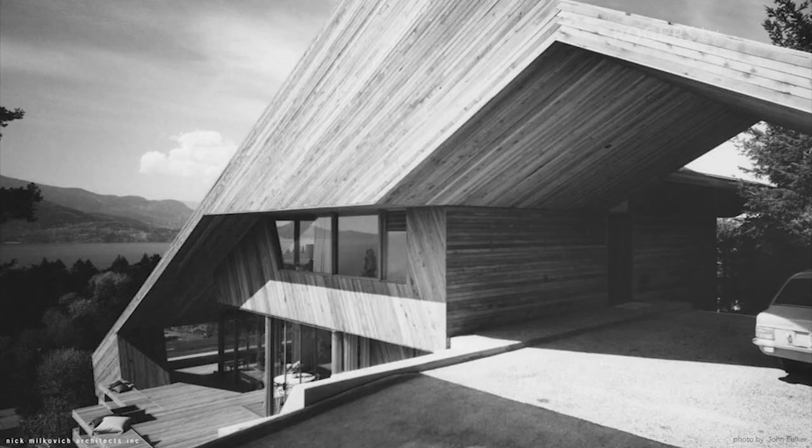It was a Catton house. It was probably the only real sculptural house that Arthur has done. Most of the other ones are more linear, but it was an interesting challenge. It's on a cliffside, as you'll see in the photos.

After that, my journey continued until about 1991, when Arthur's bankruptcy ended his journey as a solo practitioner. And then we opened Milkovich Architects, and we worked in a consulting framework with Arthur until he passed away.

For the project, like the Home Lumber office in Victoria, to put it in context of the time that happened, Simon Fraser was opened in '65. The Gordon Smith House was also finished in 1965. The MacMillan Bloedel building was finishing in '68. So these are prominent, recognizable works of Erickson's, and they all also spoke to the Home Lumber office in that regard.

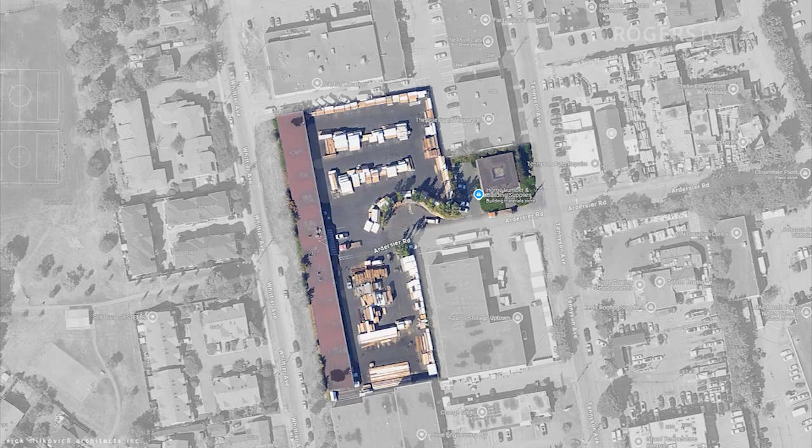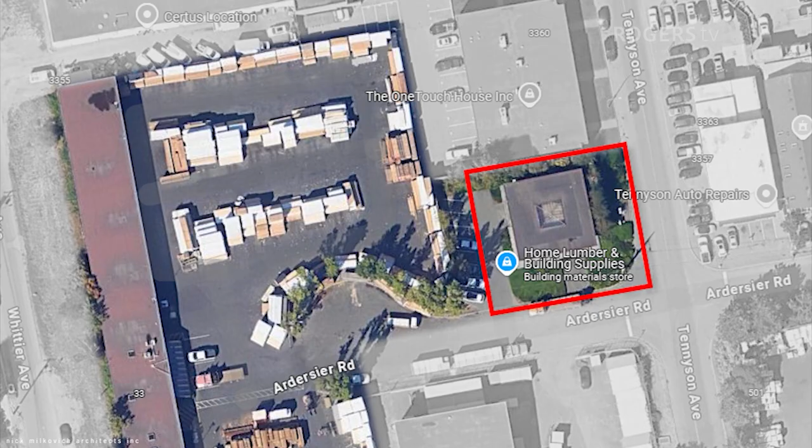The site was an L-shaped site where the broad side of the site in the back was the storage sheds for the lumber and the lumber yards, and the office is right on the entry corner to the site. And the office served as the clearinghouse for the pickups and whatever else was being bought at the site.

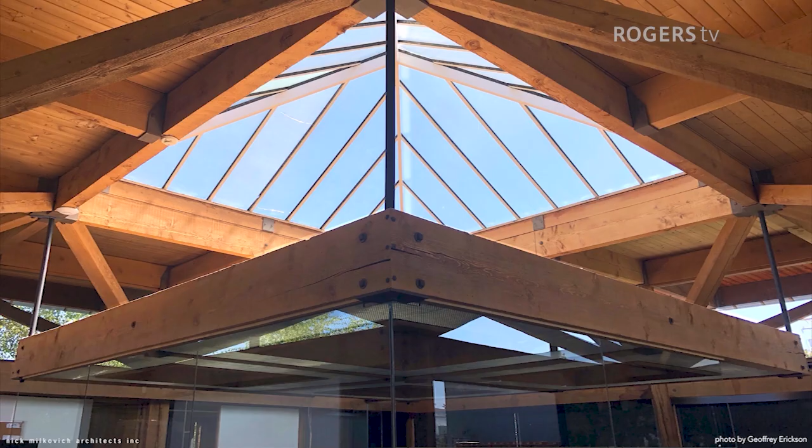The structure is a tree structure in the Home Lumber office, and it was based on a 9-square plan, where the arms that branch out from the columns form the surrounding perimeter. There were 8 columns around the perimeter that held up the trees, and the center of the ninth square became a skylight and an inversion of the tree structure. And under the skylight, there was a canopy hung to dim the sunlight into the space.

It was composed of a general office, the front office in the large space under the frame structure, and then lower, more private offices around 2 sides at the back. And the whole structure was placed on a black terrazzo base. Centered on the glazing line were 12-inch columns approximately 18 feet on centers, topped with a 12-inch beam joining them.

And as the columns continued up to the roof deck, they were cut off at 45 degrees. The corners were cut at 45 degrees to accommodate the 4 branches that touched each column, and then up to the beam structure for the roof. It also accepted the glazing line that ran through the columns at the base, and then at the corners of the diagonals that were sitting on top of the base column.

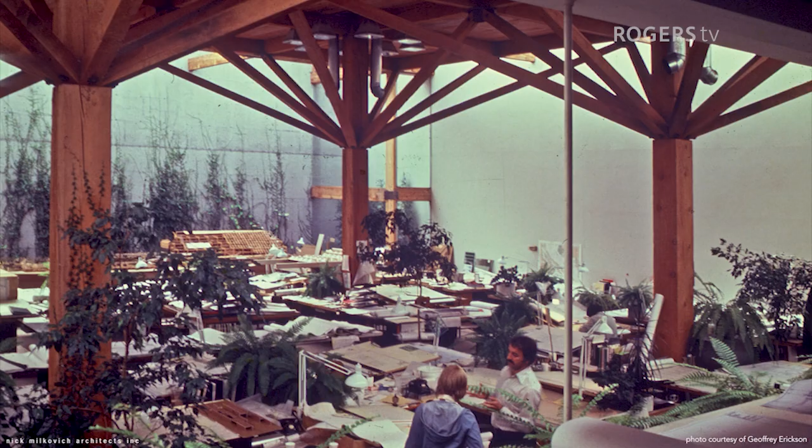When it was being done, we had moved into a new facility that we designed as our office on 8th and Laurel. And it was an interesting structure. As you'll recognize, it's very similar in many ways to the Home Lumber office, but it was an indoor structure. It was totally interior, with 4 14-inch columns that supported the roof, and skylit around the edges. There were no windows looking out other than what was in the coffee pit. So it was an interior space, but beautifully lit. It was a wonderful workspace.

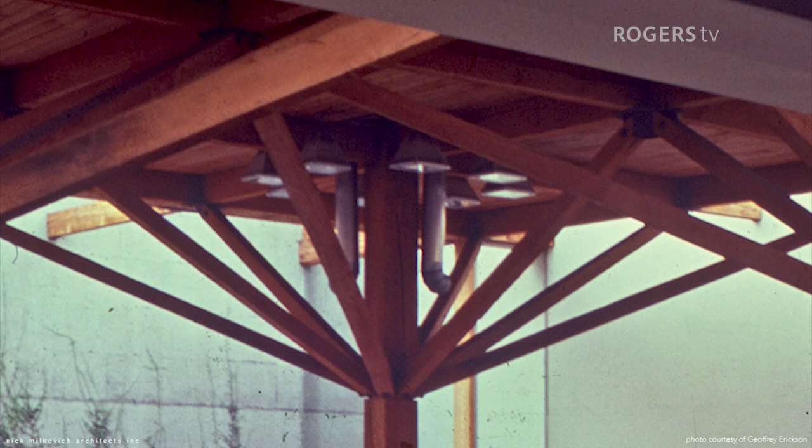And the lighting in that space was from these lanterns up above. And the mechanical system came from the rooftop systems through the ducts that you see in the photograph. And that was an inspiration for Home Lumber also, as we were surrounded by it, and also what an advertisement for their business.

The works before Home Lumber really were pointing towards what this might be, or the way it might be approached. And typically it comes out of the desire of the client. In many ways, they need a space, but also their business is lumber sales. And so what other way to treat a building than as an example of what you can do with lumber?

The first Eppich House is concrete because the owners wanted something that's long-lasting. They're from Europe, and their houses last 300 years or so. So they wanted something that's fairly low maintenance and is durable. They weren't looking at wood that much because of maintenance, etc.

And the second Eppich House is steel, because that was their business. They were steel fabricators. And so they were great clients in the way that you could draw anything and they'd make it. So it became quite experimental, including the furniture. So it's in that same context.

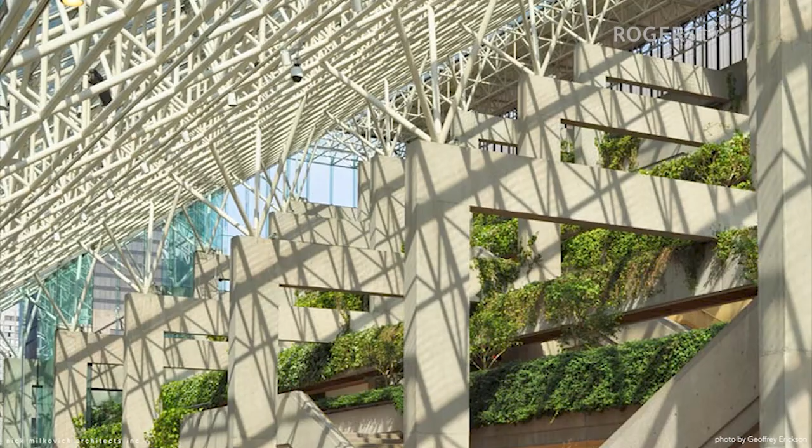It's hard to view any of these pieces alone because they learn from each other, and even when you think of the law courts, it's got a frame structure, a concrete structure with almost tree-like supports that carry the roof, the steel roof and the glass above. So they're all connected in some ways, and you learn from each one and you store it for the next project.

A great experience for me to have had the opportunity to be involved in some of these things, and massive learning just by exploring. And the office was interesting in that regard, in that it was like school forever, because Arthur was not an autocratic designer. He was more Socratic, and it was more questioning and trying to answer the questions.

And so you had a significant opportunity to put ideas forward, and that was most evident probably in the law courts, because it was a large building, over 1 million square feet. The people that were leading the project were only 35 years old, which is quite young in an architect's career. So it was a great experience for all of us that were involved in that project.

Putting forth ideas, our thoughts, and working with Arthur, where he had a great eye for detail and proportion, he's like a visiting critic to some degree, but also the collaborator at the same time. But it was never do this or do that. It was always, what do we have? Let's see how it feels, and just a process of discovery till we think it's had enough interference, and then we just stop. I wish most architects, when they graduate, would have a similar experience, because it was a nice way to work.

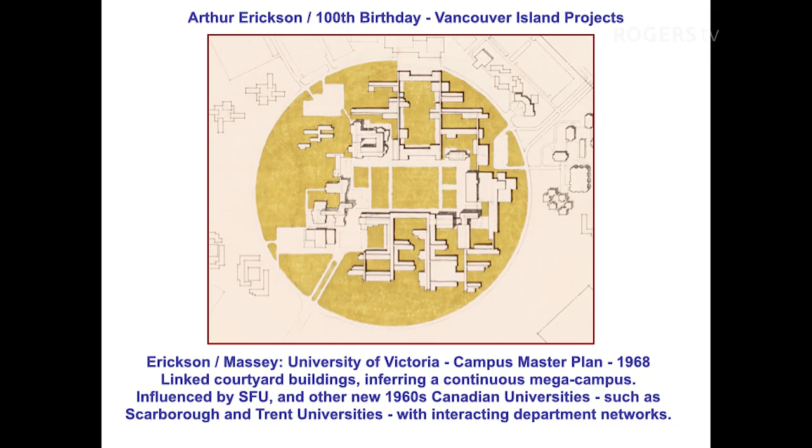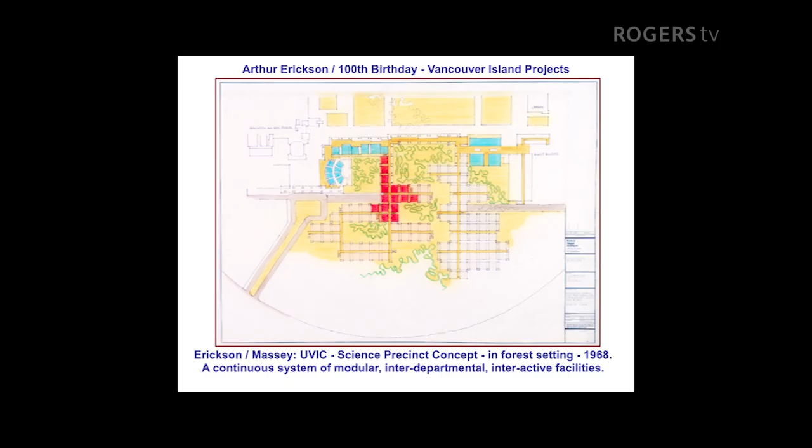And that's exemplified in this quick planning sketch that they generated for the area around where the science building is now, just south of the quadrangle, again set into that wedge of forest that went into the campus. They used a modular concept of a cluster of science buildings growing into the site here. So this is another really key concept they had for planning as UVic would fill in and move ahead. And they did a whole series of characterful campus sketches showing these new buildings linking. There were other buildings in the same idiom being built at the same time, the Commons building at UVic and some of the early housing.

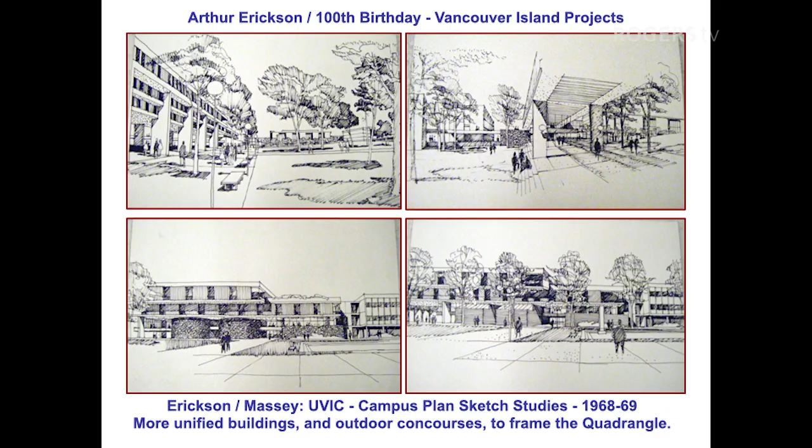And the idea of a sort of new concrete, interlinked campus development was evident in the sketches here. The presence of nature, though, in the sketches, again, is very, very integral to Arthur Erickson's sensibility. So he's got both the grand scale and also the rich landscape qualities.

So their first commission would be for the new biological sciences building, which was a component of that cluster to the south of the main quadrangle. This is one of the first concept drawings, and it shows how simple the organization, the plan was. Basically, it's a series of classroom labs, all done in modules, and in the corners of each classroom there'd be a tiered structural and service bay that would come up to support the building. And then the colored area was actually corridors and a study area that would spill out into the forest surrounding the building.

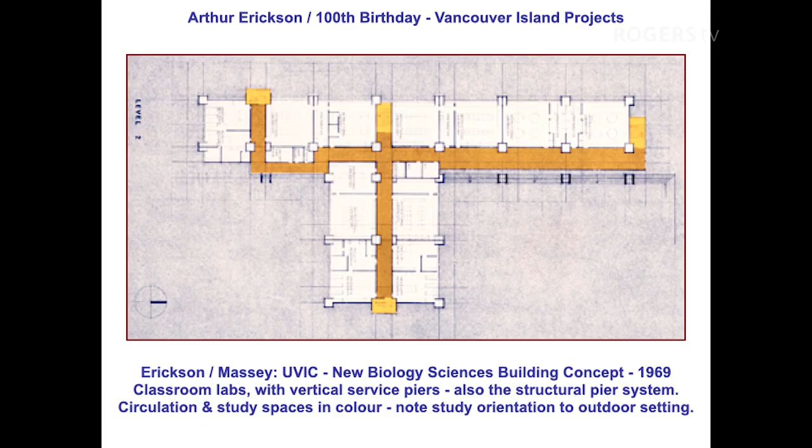So this is a very economical and very logical concept for the building, very straightforward, but very efficient at the same time. And that would quickly evolve into the early plan for the new biology building. You can see the piers that they had at all the corners of the building are now rotated to become angular. They would often have services for the building, and they also, as we will see, became part of the structural form of the building.

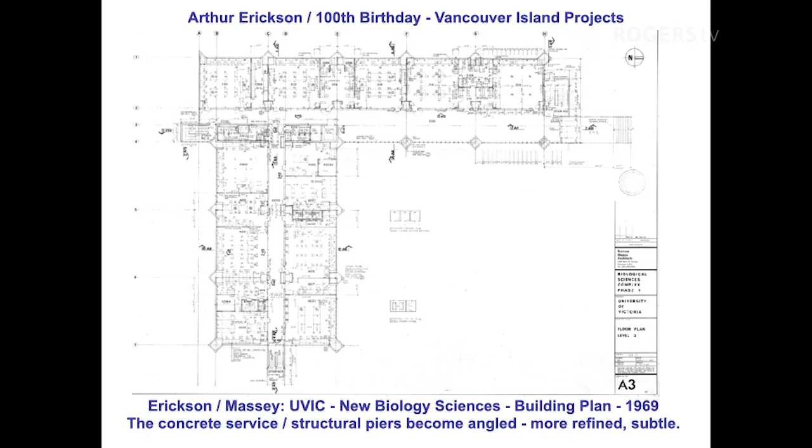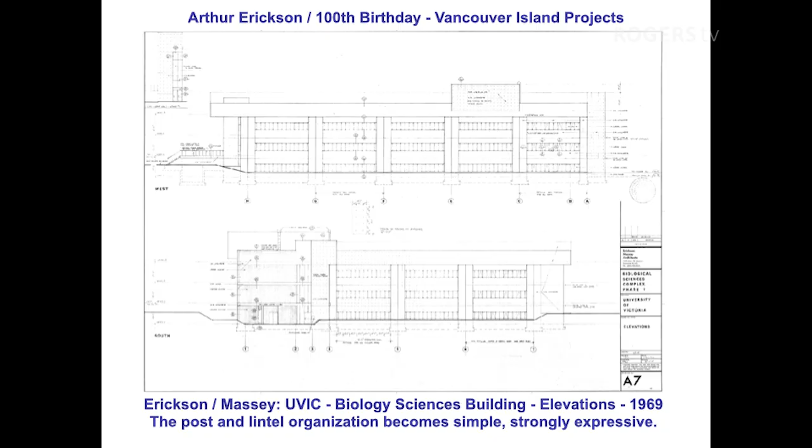Here's the bays of study areas that were open to the forest. The views of the forest came up into this area. These plans aren't landscaped, but you'll see in the photographs that the building had a very strong landscape relationship. The post and lintel idiom that was very much Mr. Erickson's sensibility in the late 60s is evident in the elevations of the building, where you get a strong rhythm of vertical piers and then a big capping horizontal lintel across the top.

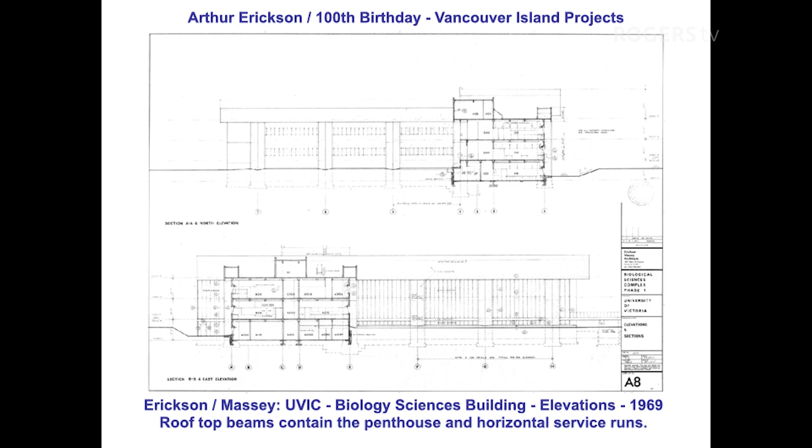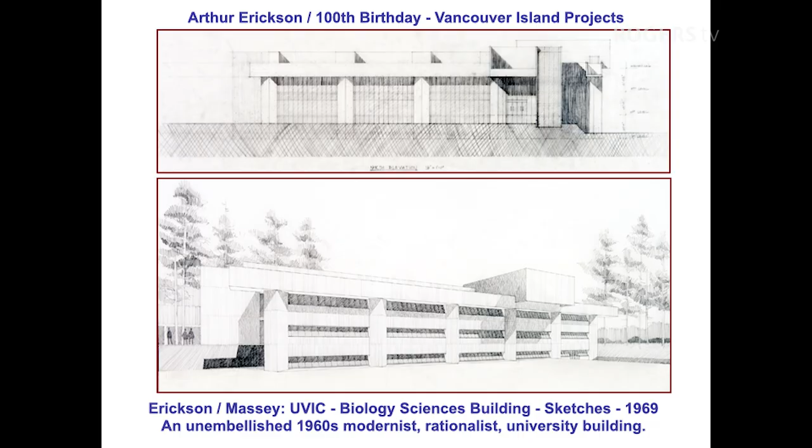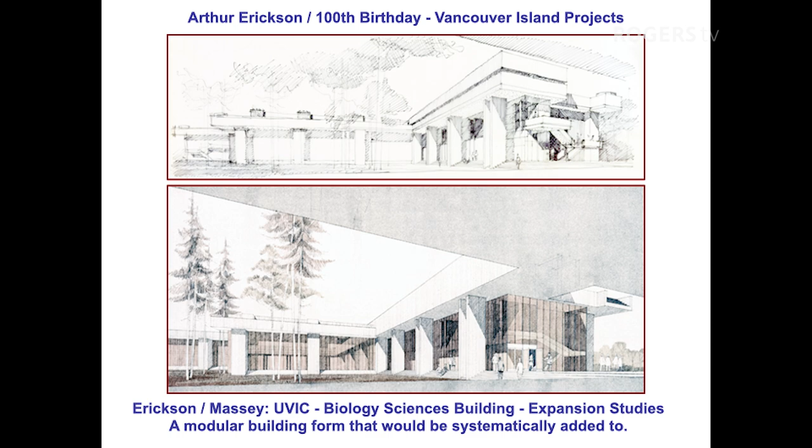But the other thing that was really powerful was that the structure of the building was entirely exposed concrete, very much in the idiom of the Erickson and Massey firm's work at Simon Fraser and other projects they were doing. So they brought over this idea of the concrete megastructure into the design of this building. And they foresaw it as a system that would extend from the original biology building into other wings and eventually create the science complex. So these are little sketch studies of the evolution of the science complex looking ahead.

So here we are. They were then commissioned to execute the building, all in poured-in-place concrete. I will say the quality of the concrete work is unbelievable. No pour joints, no areas of erratic concrete aggregate. Extremely well built, well executed and thorough, but an expression of power and of a grand, heroic modernist building. And you can see the way the beam structures would project beyond towards the landscaping. The building is set in a very rich natural landscape.

It opened just in the first year that I was beginning as an undergraduate at UVic, so I saw the building being finished, remember it being opened. I remember the discussions about it. It was definitely a very topical building in the early 70s. And here's some more photos of it again. It's a period piece. It is not one of the signature buildings on the campus, but it's a presence for sure.

And it is dated in many ways. The wood infill up in the ends of the beams is of its era. It's copper naphthenate treated cedar siding and so on. A lot of politically incorrect elements, I guess, of the era, and they're still in place there. And of course, it's a laboratory building, so here we see the laboratory activities projecting from the building. It's full of the biological sciences. It's been a very effective building for that department, which is probably one of the most prominent departments at UVic.

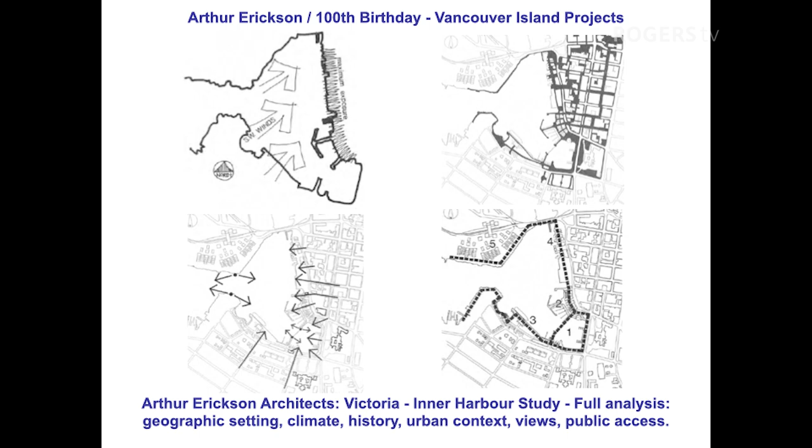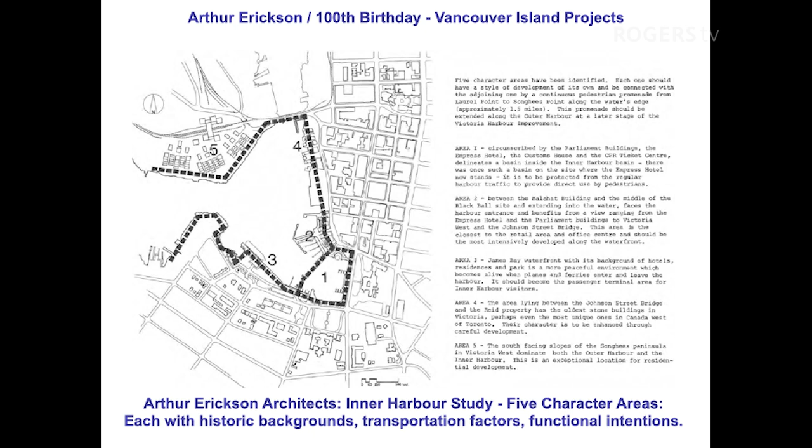In 1973, the harbor was still largely industrial, and he was looking ahead to it becoming urbanized and becoming a civic kind of place. Part of his analysis was to divide the harbor up into different areas of character zones, and a lot of this is still with us. This study is so sweeping and inspired and visionary that we are still kind of wrestling with little pieces of this vision that he put out. So, dividing the harbor up into character areas and having a plan and a vision for each of them.

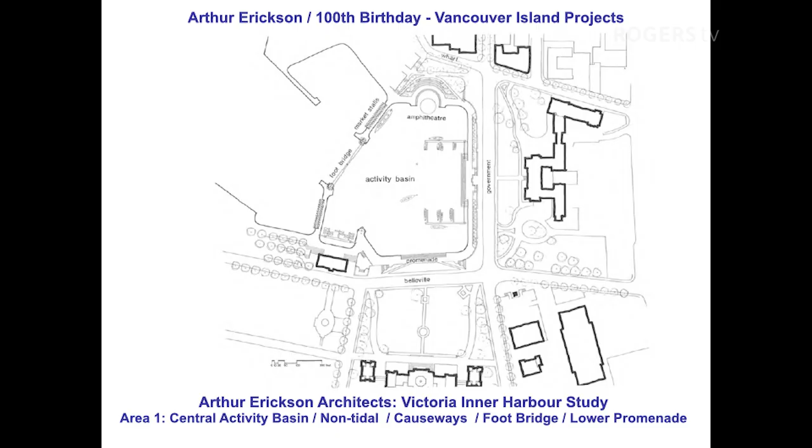This is his plan for the first area, which is the inner basin of the inner harbor, which he saw as what he called the central activity basin, just facing the Empress and the legislature. He saw it as a more captive area. It would have a series of pedestrian causeways surrounding it, an amphitheater on the north end, more elaborate terrace walkways leading down to the waterfront from the legislature and the Empress, and then a captive kind of dam and bridge that would actually capture the tidal movement of this basin of water. So the tides would not go up and down, they'd stay at a single level. So there was never going to be a low tide in the basin.

The next pressing area, again, these things are all still with us, was the area that we now call Ship Point and the area adjacent to Old Town. The Old Town report had come out just a few years before the study and was well referenced in the study, and Erickson's firm's ideas about how the harbor would relate to the Old Town were quite sympathetic. The scale of buildings was low and so on, and the buildings would kind of terrace down towards the water, and also the walkways and the view lines would kind of penetrate through the site.

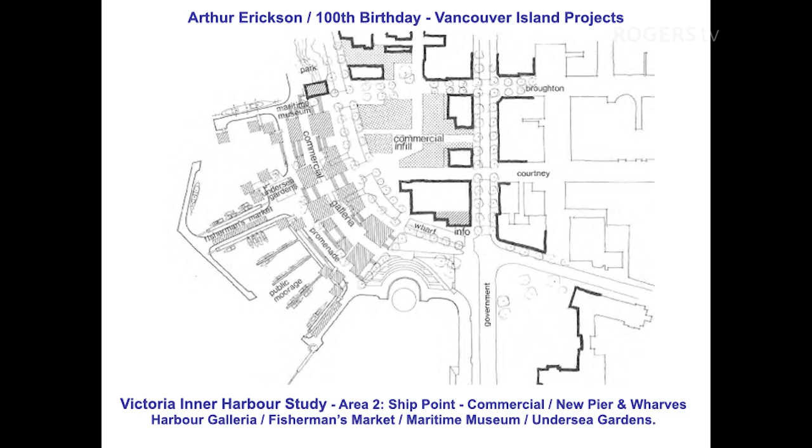So in this area of the harbor, he first saw, here we go, Maritime Museum, Undersea Gardens, Harbor Galleria, Fisherman's Market. So it was a very, very multi-purpose view of the harbor, very thorough. And then another considered area right now is the area on the south side of the harbor, which is where the Coho and the catamaran to Seattle run from.

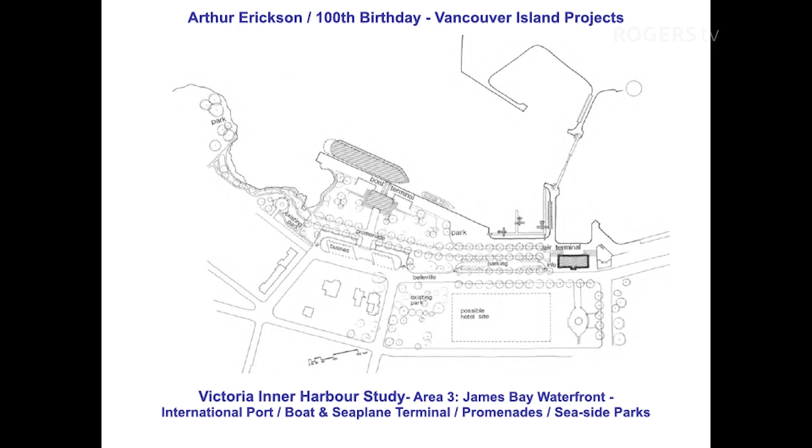And again, he had the idea of an international port, but also with parks, walkways, a seaplane base, a whole cluster of integrated planning. So the planning was so thorough and well integrated. The next area was up near the Johnson Street Bridge, where Old Town was sort of cascading into what he called a pedestrian mews, Old Town shopping mews on the harbour, in scale with the older buildings sort of up the slope.

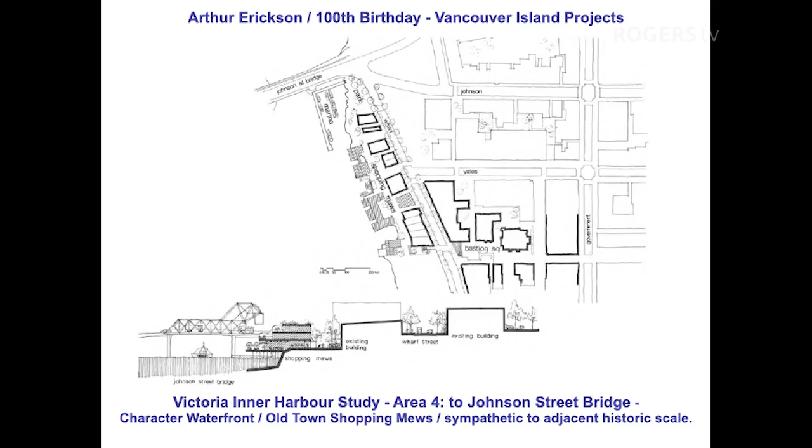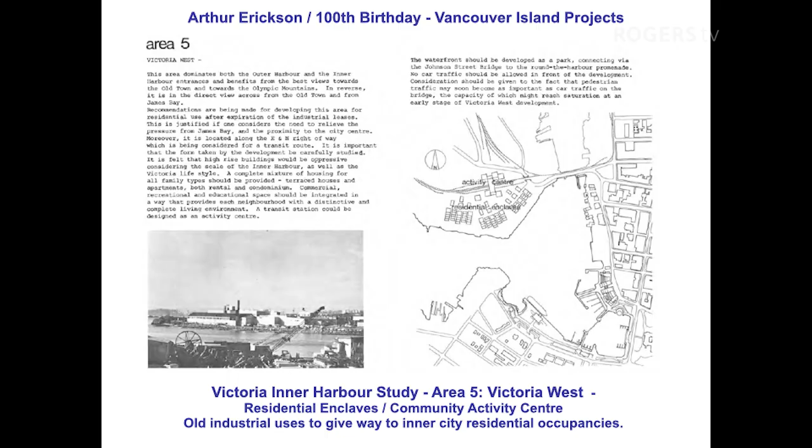The Songhees area, he had the idea at this stage, 1973, of it primarily residential use, also framing the harbour from that side. You can see the condition of the harbour at the time of the study. It still had large industrial buildings and sort of underused wharf areas all surrounding the harbour. It was really dead for pedestrian access except right around the causeway itself. And his idea was to enliven all the foreshore around the harbour.

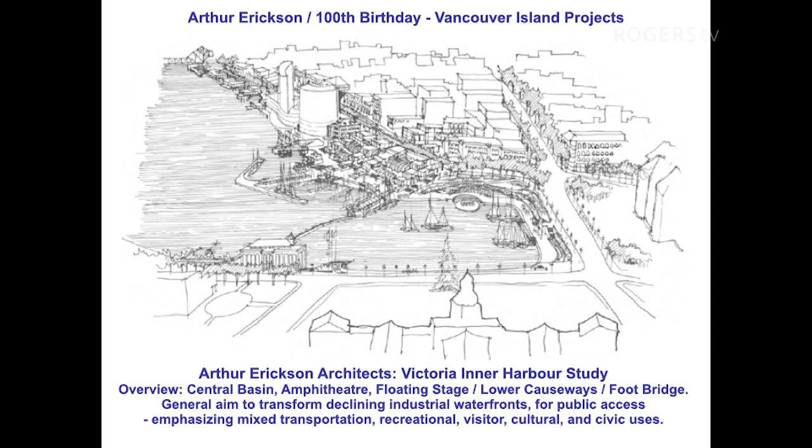And here it is sort of summarized in a quick sketch, which looks into that tidal basin. It looks through the terracing buildings sort of surrounding the Old Town area. Unfortunately, the Reed proposal, which had been originally for three point towers, pencil towers at the end of Fort Street, had evolved into sort of a simulation of Toronto City Hall. So that was a given that he had to adopt in the plan.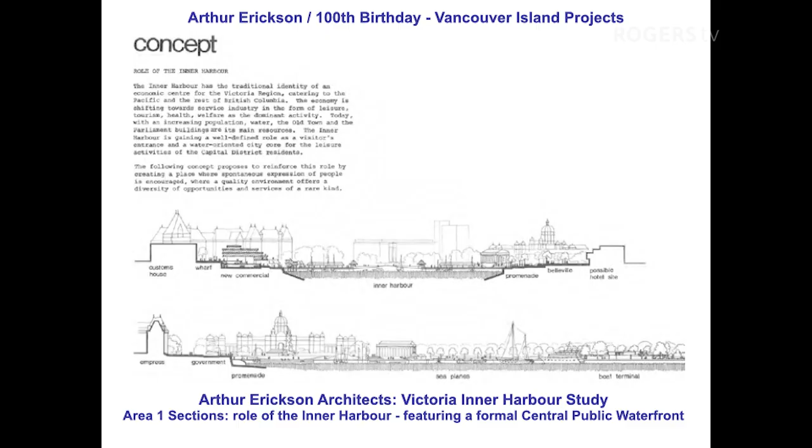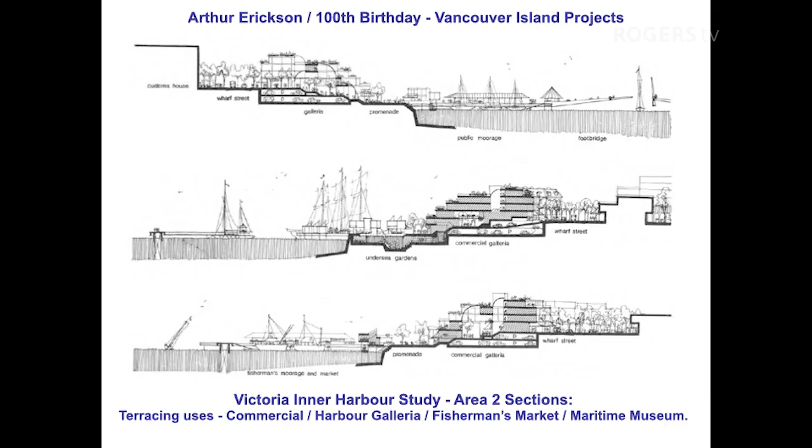And the firm did very elaborate, detailed concept sketches of the relationship of the surrounds, the public areas, to the water and to the harbour itself. It's a textbook example of an urban design plan. And the emphasis on terracing buildings, the emphasis on different water elements. I did mention the Maritime Museum and the Undersea Garden, but the expression of actual marine and aquatic uses kind of being focused on the harbour sort of run through the plan as well.

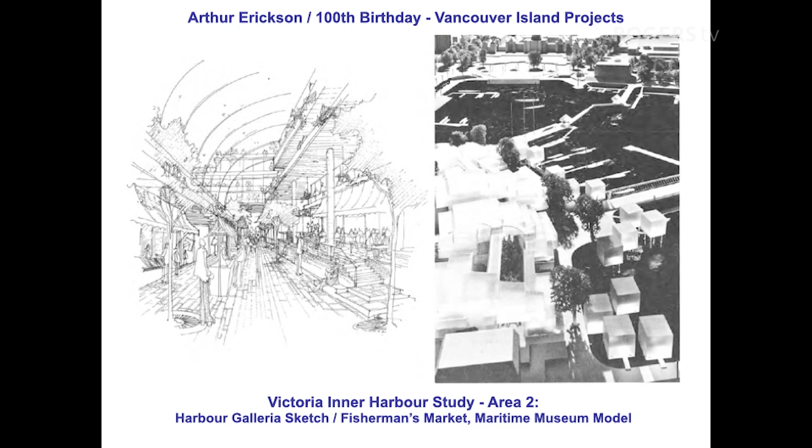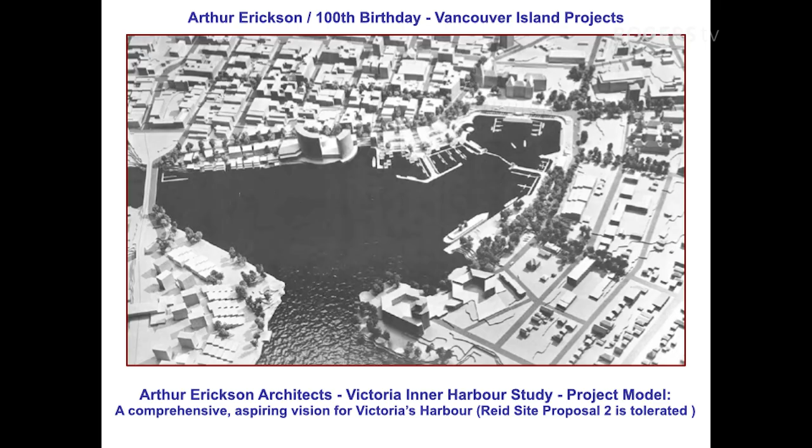And this was a sketch through the Galleria, and then also part of the architectural model showed some concepts of the Maritime Museum fronting onto the harbour. And this is a view of the overall model. The city had this model for decades. It's disappeared now, but it was very inspiring and challenging for Victoria.

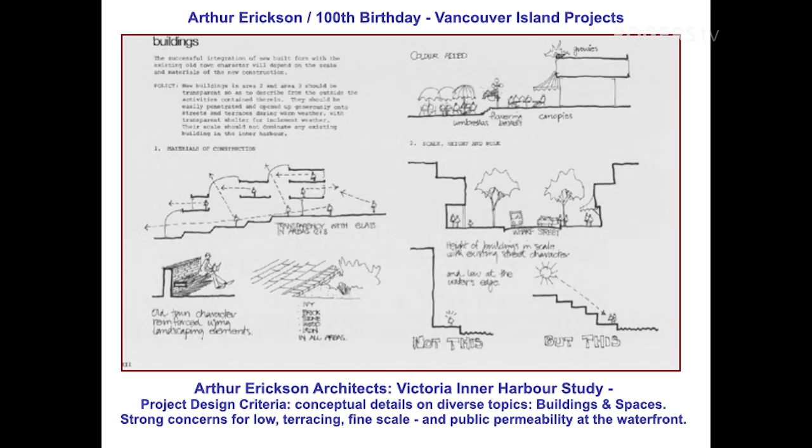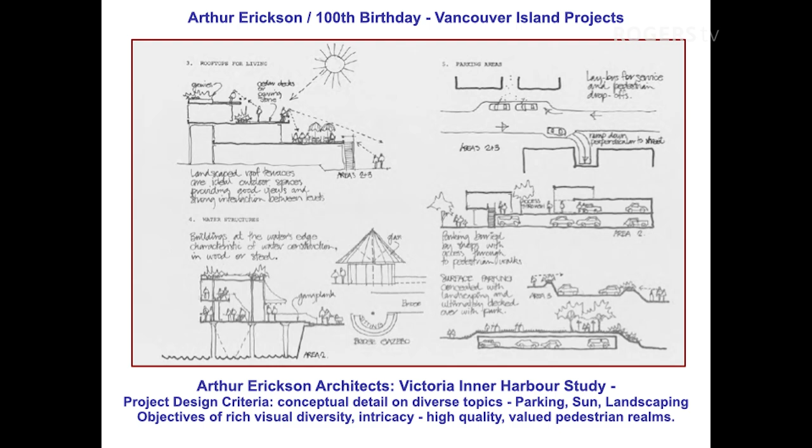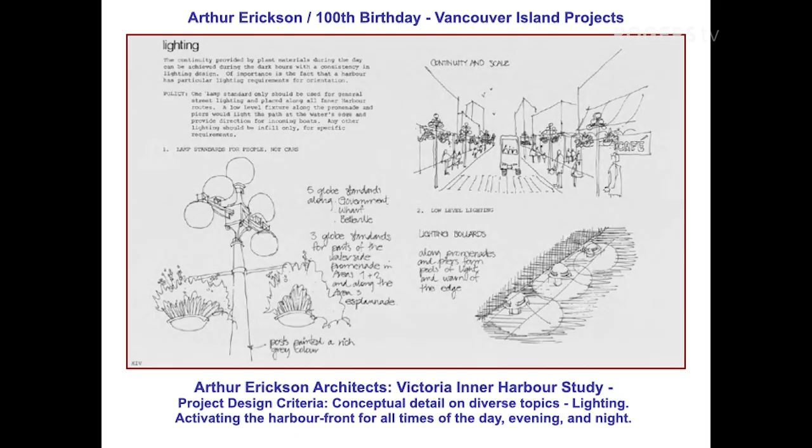It was full of quite rich kind of urban design concepts for buildings and for public spaces, for landscaping, for lighting. It's a textbook study. It should really be published. I haven't seen many projects with this level of subtlety in any city. And the landscape and lighting was given a lot of specialized attention as well. So it was visionary and very thorough and probing and bold.

So there were reactions. There were criticisms as well and also compliments, of course. For Victoria, this was an earth-shaking kind of examination. Peter Pollen, the mayor of the time, had instigated the study. I think he became quite close with Erickson, but there became quite a bit of to and fro on, well, can we really do all this? What about a captive water basin?

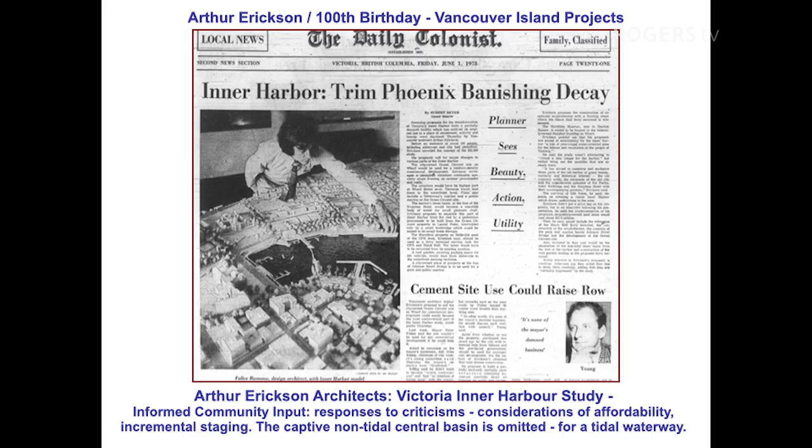And to all his credit, Arthur Erickson listened to everything, and the plan kept evolving. So the captive water basin eventually became just a tidal basin with a pedestrian bridge framing it. And there were other things that kind of evolved with the plan. So it's an interactive dialogue with the community. And there were lots and lots of great discussion. It was very colorful and lively. It's an honor for Victoria to have had a project of this quality. And I think it should inspire us all.

And he did actually manage to convince the province to step ahead for Victoria. And so the focus came eventually into creating the lower causeway areas around the Inner Harbour basin. So that's what could be afforded to be done, and made a lot of sense. It was not an entirely original idea. The idea of a lower causeway had been proposed in 1958 for the BC Centennial, when they had marine battles depicted in the harbour as part of the centennial celebrations. And planners at the time said, wouldn't it be great if we had a lower walkway causeway?

So the idea was already around, but the wonderful thing is that it was executed so well through Arthur Erickson and his office. It's a very refined piece of design, really complementary to the upper causeway. Norm Hotson was one of the young architects working on the project. Again, Arthur shared credit with all the younger architects working on the project, as well as took in their ideas and enriched the quality of the project. And also, there were continuous reviews, and it was an evolving kind of project. It was not a stamped, fixed kind of proposal just to charge ahead. And so over the years, it's evolved a little bit.

The portion of the causeway in front of the legislative building was a later addition, and Erickson sort of compromised there. He had a set of terraces and tiered passageways down to the harbour, but Victorians wanted to retain the Welcome to Victoria sign, which I think is still there. So he was tamed a little bit, but he was so visionary, and he's so uplifting for the city.

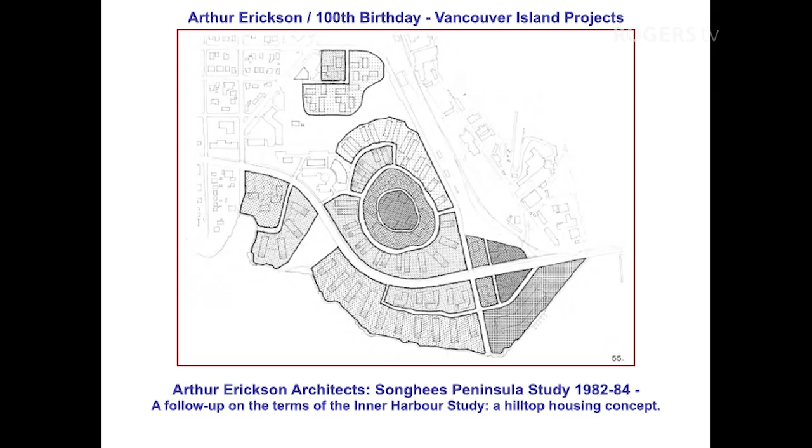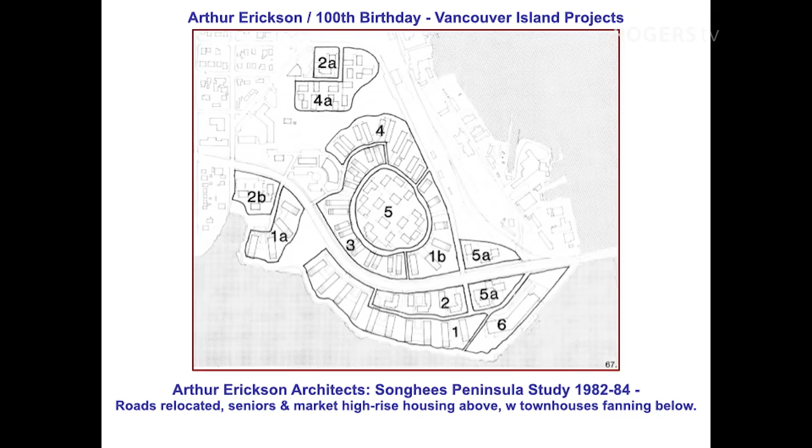towards the waterfronts below. And at the time, in the early 80s, there was a lot of concern for housing. So a lot of these projects were the co-op housing projects, and also seniors' towers on top of the hilltop. So the housing topic is not a new one that we are dealing with. And the causeways, the co-op buildings were some of the first buildings built, and also the seniors' tower on top.

Again, this was controversial. It was seen as perhaps a bit too monolithic and so on. But it was a vision, and I think the quality of this, particularly this concrete built tower, is pretty high. Again, it's incredible concrete work. Plus, it's toned. If you look at it closely, it's all got colored, toned concrete finishes. Very high quality. All to the standard of all the work from his office.

And then, of course, here we are with the end result, which I think is a world-class urban waterfront in Victoria. It's probably due a little bit of maintenance. I think full restoration of the paving areas along the causeway edges. The tile work was what they called a quartzite or a slate tile, much of which has begun to disappear. It all needs to be restored well, I think.

I'm concerned that renovating it and giving up the elegance and the sympathy of the design should be challenged. Similarly, the upper causeway, the walkways and so on are long overdue proper paving. But Erickson, there's no doubt, the quality of his work and the quality of his collaborative philosophy is so evident in this project. And the beauty of the night lighting is something to behold too.

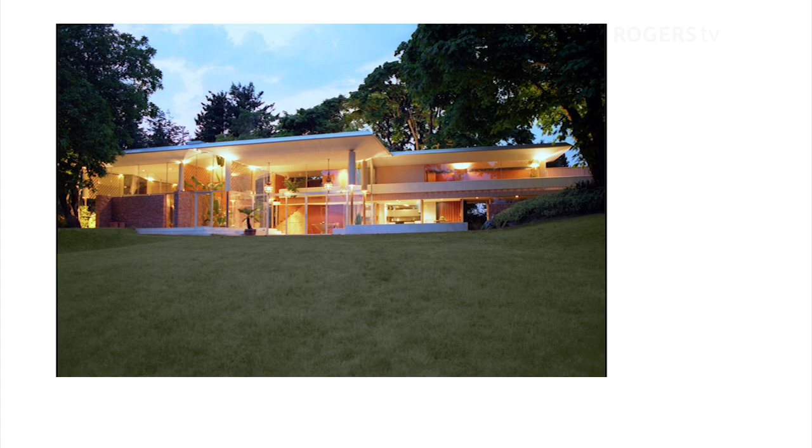So, about 2004, when I had just arrived in Canada, the Chinese publisher talked to me and said, maybe you should find some Canadian architect and write something about it. And I said, how about Arthur Erickson? So they heard about Arthur Erickson. He has strong influence from Asia, from Japan, from everything. So they asked me, how can we discover something like that? So we chose some of these houses.

So, from this building is a Filberg House, Jeffrey gave it to me. So I asked Erickson, what do you think about this one, right? He said the site is different. We should build for this. Every building, every site, every topography is different. We should build something. So I asked him, so how do you get the idea?

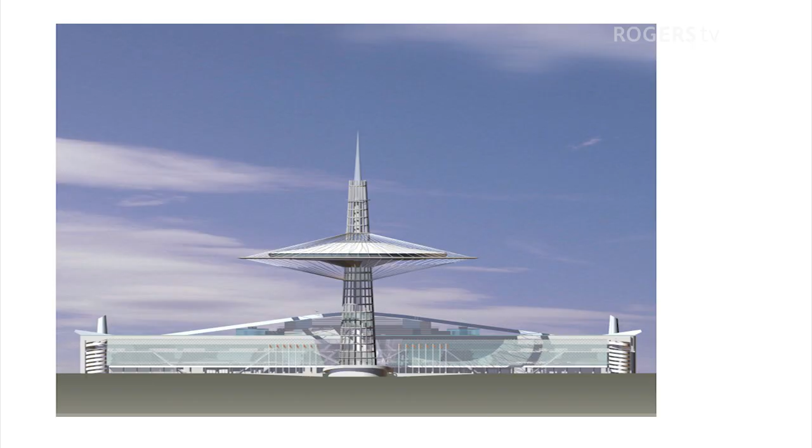This is a project we bring, Jeffrey talked about that. In 1998, I was in China. I was working for the local government. There was a design competition in the Shenzhen area. It's an exhibition hall, right? So the first time I heard about Arthur, somebody said Arthur really wants to participate in the design competition instead of being on the judge panel.

The first time I saw him was very, very interesting. He devoted his whole life to architecture instead of enjoying his fame and everything. It really moves me, people working so hard. Thank you.

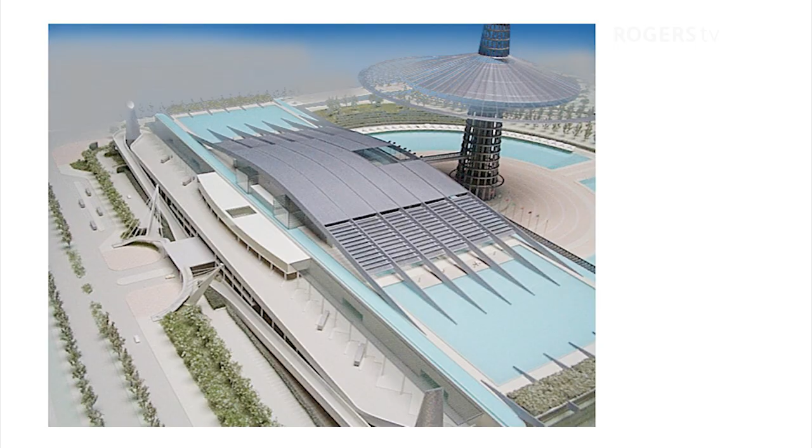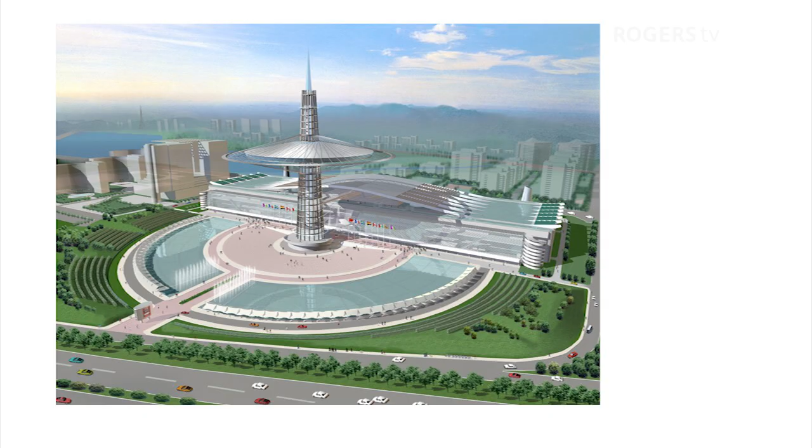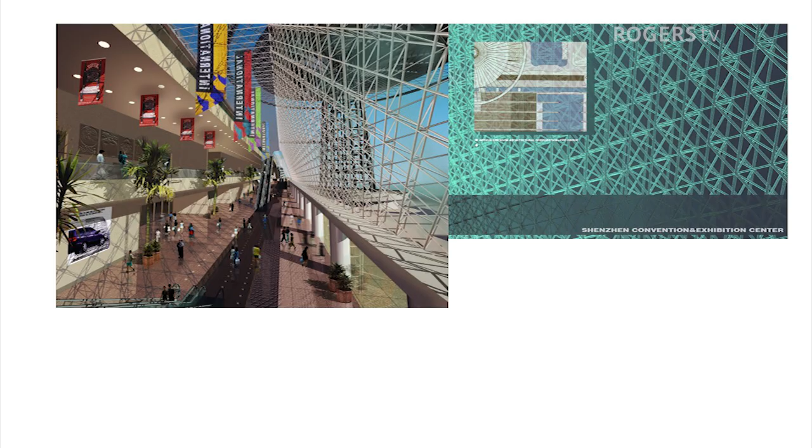This gives you an idea of one of the larger international projects that Arthur did in China. He did lots. It's very futuristic, and we're hoping that we can feature this in the Arthur Erickson 3D City. It's been something evolving over time. Recently, of course, people have been working in 3D and so we're able to continue and bring these projects easily into such a model. These are just some of the views from it.

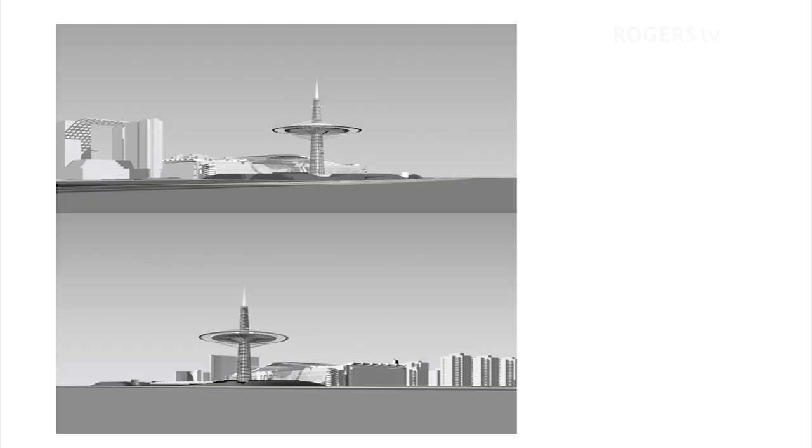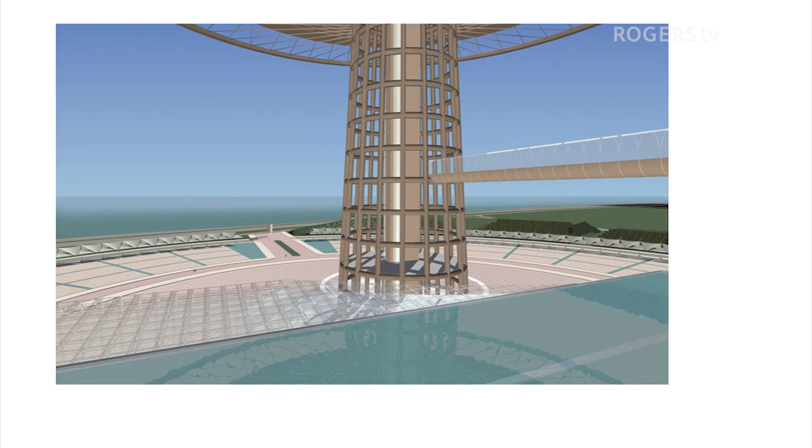Very adventurous submission. He didn't win this one, unfortunately. I can't remember the exact circumstances, but to use that word visionary again, I think that would apply. These were actually very early 3D modeling exercises done in his office. Just to give you a little bit of scope of that particular project.

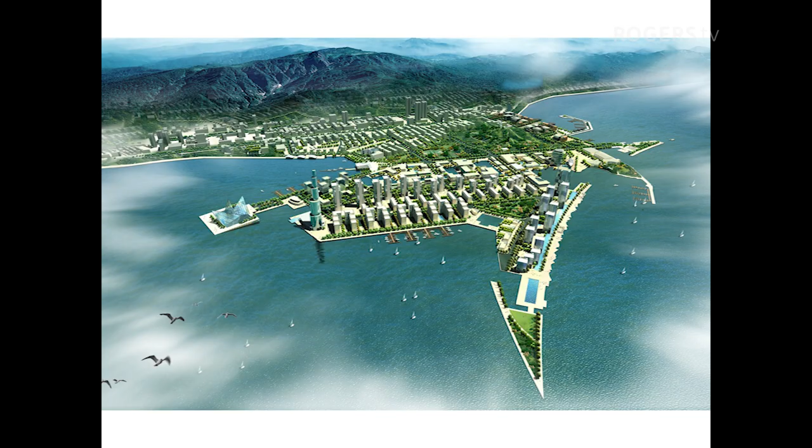Weihai, where they did the master plan for the harbor, and the cultural center. Of course, these projects weren't finished by Arthur. So we have them in what's called conceptual design on his website because he wanted a section for conceptual design separate from the others because he didn't complete them. But if you see the early models, you realize where all of the ideas came from for these.